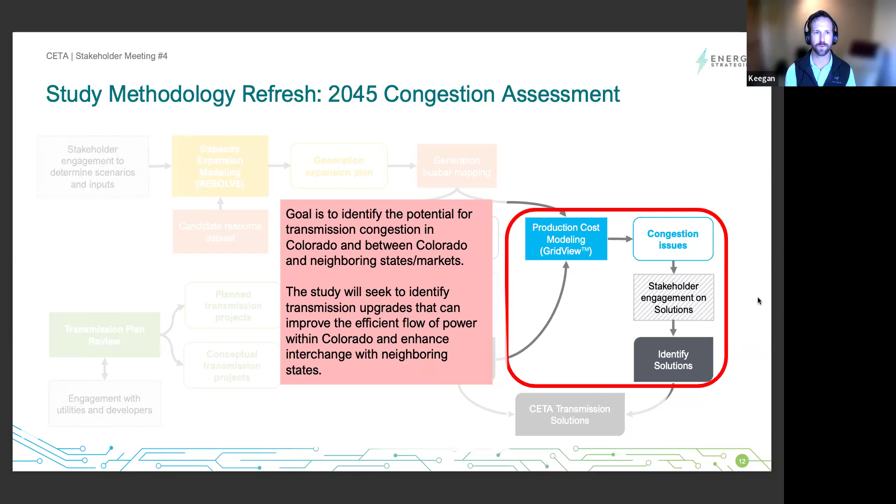We really don't have much choice as to address the reliability and the deliverability needs of the system, right? We can't go without addressing those, literally from a NERC compliance standard, but also philosophically, we've got to round that base first, so to speak. The next base we hit is this congestion assessment, and we take into account all those other upgrades first. So a lot of times we don't see a lot of issues when you look at it from that perspective. I'll go to the next slide here, and I'll kind of explain what we found.

So this is the final analysis, basically just saying what I said. We performed the study. This is all focused on Colorado and Colorado's interties that connect to other states. And we're looking for congestion that, if addressed, could improve either in-state transfer of power or interchange between other states. The generation loads, everything's consistent with all the modeling we've done so far. So this isn't a new model. It's all entirely consistent down to the exact generation fleet. So that's why we're able to say some of the things we can say.

It's all internally consistent. So once we identified some of those congested interfaces, we did a little power flow modeling to develop some solutions. We had a lot of data and expertise to draw on there from the work that Thomas mentioned a lot of. And we were able to select additional upgrades and test them in the production cost model for their ability to mitigate that congestion.

So one important concept is, do you want to address all congestion? No, that's probably not the case. There's an efficient frontier from this perspective, which is that some congestion on the system is probably good. It means you haven't gold-plated your transmission system, and you don't want to address it all because the cost of the transmission is likely more than the cost of the operational savings that you might realize, and other savings.

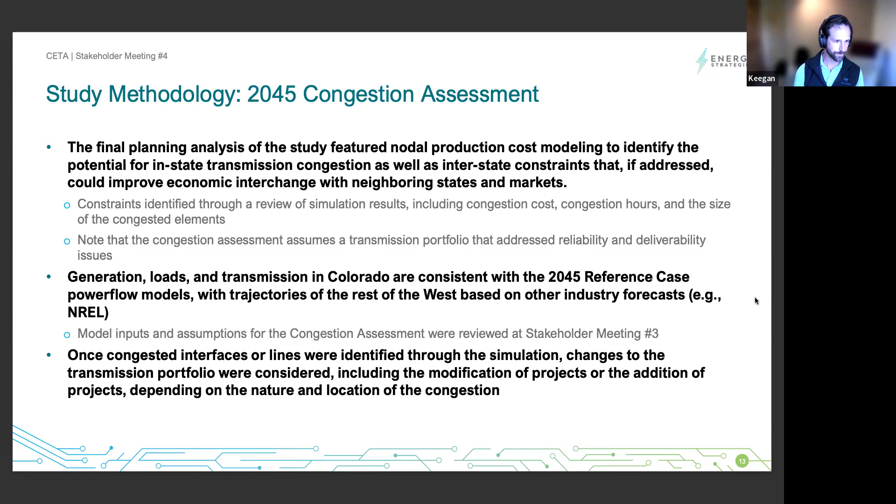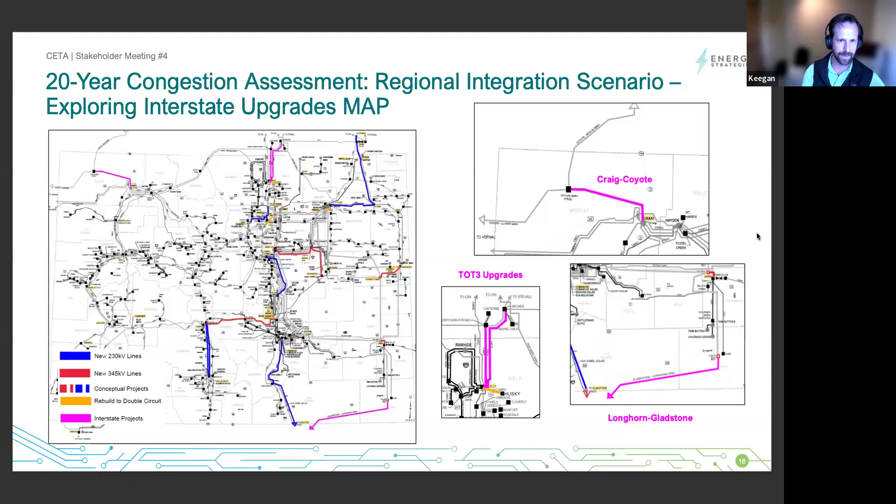So I'll go to the next slide now that you've got a sense of that, and just present some additional study results. These are some additional dispatch modeling results. What you see moving left to right is us adding more transmission. The general trend is that as we move from just the in-state reference portfolio upgrades and add some of these additional economic upgrades, we mitigate some of the solar curtailment we observed. The interstate projects help that further.

Clean energy penetration is always going to move around a little bit. It's just so sensitive to what unit is dispatched where. But overall, the portfolio is hovering around 92% clean in Colorado around this time horizon. And all the transmission is effective at pushing down CO2 emissions in the state. And importantly, we did see some material production cost benefits.

So one of the things we observed, I think, was savings of about $16 million a year due to these interstate upgrades. That doesn't seem like a lot, but on a 40-year present value basis, I think that's around $300 million or so, all discounted back to present day dollars over a long time horizon. So that's a material operational savings, and that's not to say that's the only benefit of those types of upgrades.

We'll explore some of those other benefits later in our study, and that'll be in the technical report. But we do think some of these interstate upgrades are showing some important efficiencies just from an operational standpoint, let alone from a load diversity sharing, a kind of resiliency risk mitigation perspective. There's a lot of other categories of benefits we'll explore.

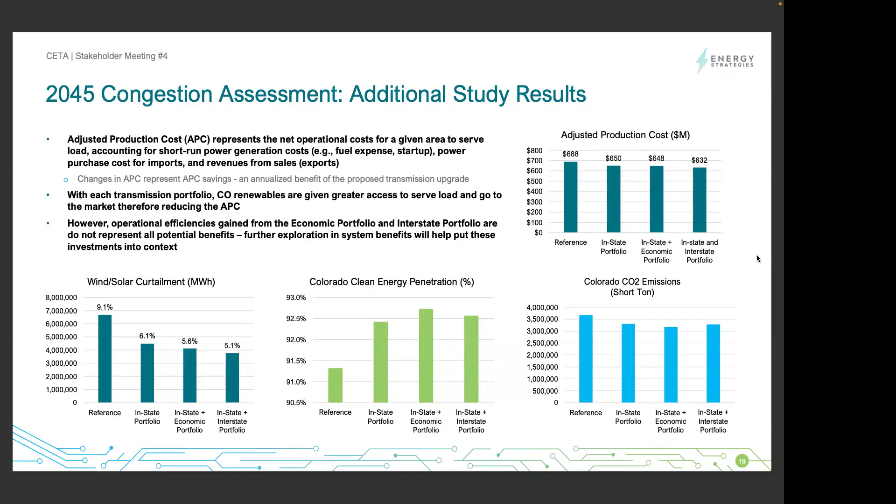That makes sense. Thank you. Yep. Just want to address that, that one's easy. So go ahead, Tom. I think you're next. I think so. Cool. So if we go on a couple of slides.

So we'll talk more about where we are with our final portfolio. In the last meeting, we talked about our reference studies, our 20-year analysis. If you go on to the next slide, it goes back to the flow chart that we'd been starting from. At the last meeting, we were really just focused on that orange box there. We're doing the power flow modeling, getting our 20-year models all established, looking at the reliability issues and coming up with solutions to those issues.

And then as we've expanded to come up with what we call our final portfolio, we also took into account the production cost modeling that Keegan just talked about. We uncovered a few little projects based on that analysis. And then we also did some alternative analysis looking at the portfolio that we had and how some potential alternatives might adjust our final portfolio, and also taking into account stakeholder feedback to come up with that overall portfolio.

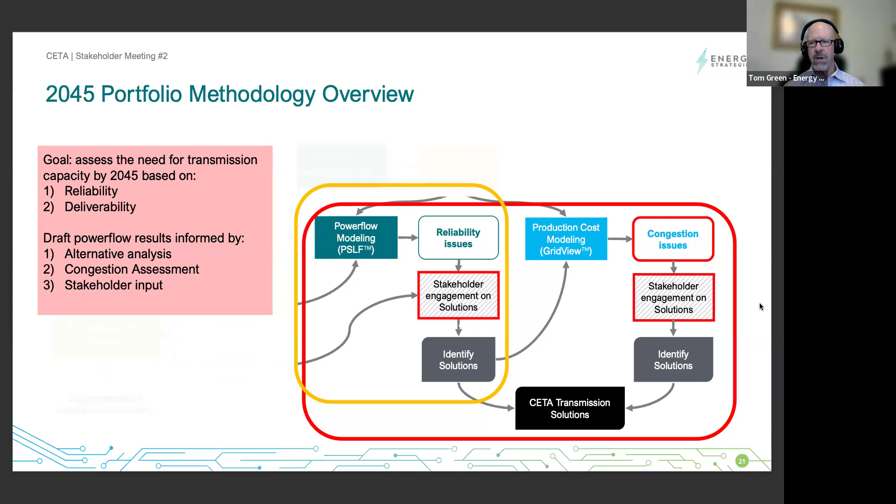As we talked about doing both a reliability type analysis and a deliverability type analysis, at that time we'd focused on deliverability by breaking the system into 9 zones and then looking at each of those zones individually, scheduling up the generation to high or maximum levels within each of those zones, scheduling it out of those zones and determining what the transmission issues were, and then coming up with solutions to those issues.

And again, the idea, as Keegan mentioned, was to develop a transmission system that would be reliable for all types of conditions. Then we took that information and put it into more of a reliability type analysis, scheduling down the generation and ensuring that the system was reliable from a more holistic statewide view. And so that's how we developed our original portfolio. Going back to that last stakeholder meeting, our draft portfolio was near $4 billion. We had a lot of new projects and a lot of reconductor costs.

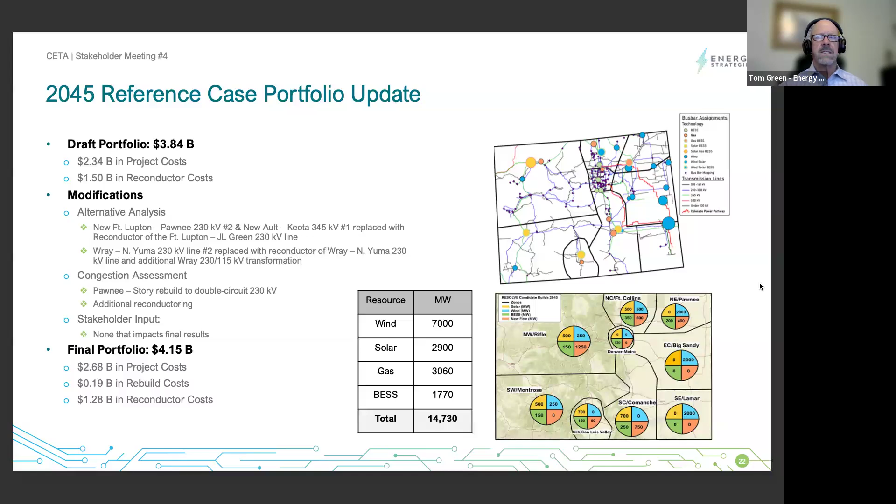If you go on to the next slide, this is a map of the final reference portfolio. I didn't put in a comparison to the last because there's really not a lot of change between what we're seeing here and the last portfolio. But again, the blue lines are new 230 kV lines. The reddish lines are new 345. On this map, I'm not showing the conceptual projects. I'll talk more about that a little bit later.

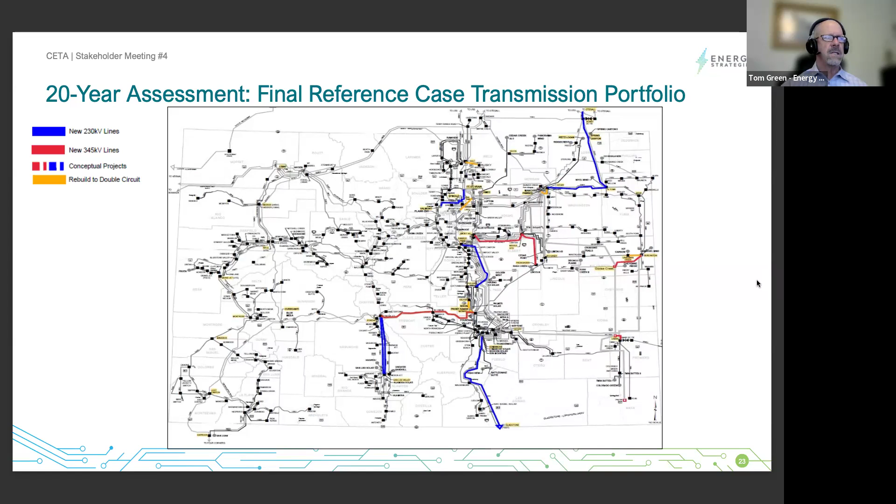And then we have a couple of areas where we've actually rebuilt some existing lines to double circuit. So this looks like there's not a lot, but this is just capturing the new projects, of which there are about a dozen. What's not shown on this map are the number of reconductors that we did, because the map would completely be lit up with reconductors. If you move on to the next slide, just to talk a little bit more about some of the alternative analysis that we went through, I've highlighted a couple of areas where we found some efficiencies.

In the preliminary portfolio, we were looking at building a new Pawnee-Fort Lupton 230 kV line, really a second line in that same corridor, and also a new Ault to Keota 345 kV line. I still think those are great projects and could actually be part of a portfolio in the future.

But what we found when we were looking at alternatives is that if we did some reconductoring on some of the other local lines in the area, in this case the Fort Lupton to JL Green line, we actually saw that the problems that drove those new lines were mitigated. And so you see there was a difference in cost there of about 200 million just by reconductoring some existing lines rather than building those new lines.

I did list here the St. Vrain to Windsor reconductor. That was one of the lines that came out of the congestion analysis. The only other line of note that came out of the congestion analysis was a second Pawnee-Story 230 kV line. That's one that I think other planners have seen in historical planning, that there's a single tie between Pawnee and Story. It's a 230 kV line, and that just makes sense. It's a pretty short line, about 10 miles. And so that popped up in our analysis too, and we put that in our final portfolio.

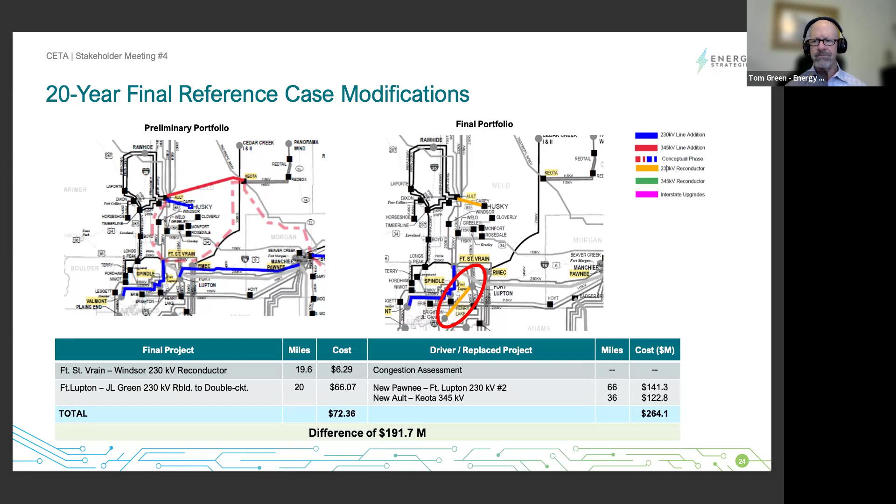Going on to the next slide is another example of where we were looking at a line. This is in the northeast area of Colorado. It's a line between Wray and North Yuma. Originally, we looked at building a second line between those two buses, and we found, going through some alternative analysis, that if we just reconductored that existing line, some of those issues went away. Now, we did still need a new transmission line between North Yuma and up to Sidney, and between Wray, North Yuma and over to Story. So those were key elements in the portfolio.

That's an area of the system that is really mostly 230 kV, 115 kV. So once we started adding resources in that area, we saw a need for additional transmission. But you see there was another example of a savings of about $30 million just by going through that exercise.

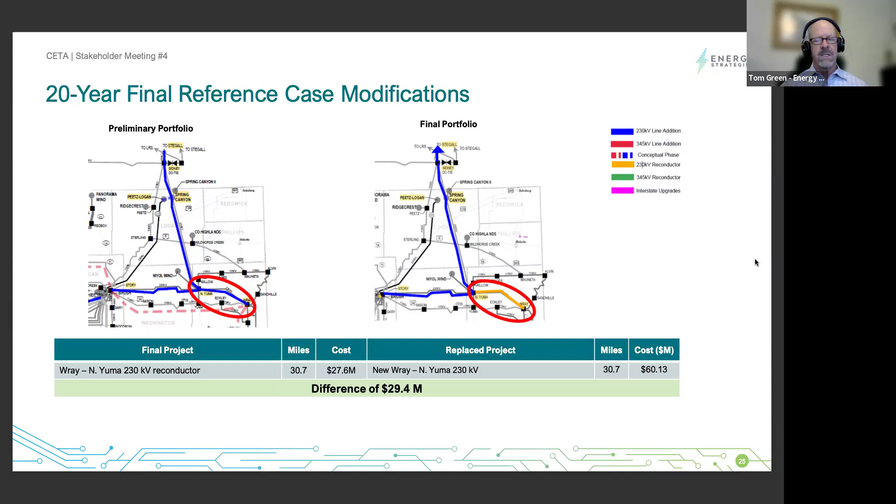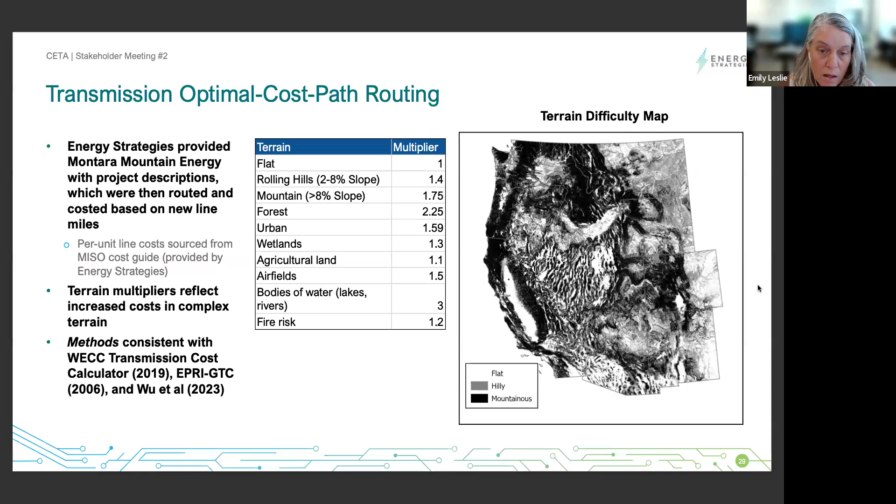With these inputs specified, the least cost path model identifies the detailed route from point to point, avoiding essentially the darker areas on the map. You can go to the next slide. So we ran the least cost path model for about 150 lines identified by Energy Strategies. The lines range from a few miles to 160 miles in length.

The estimated cost ranges from about $400,000 per mile to $8 million per mile, depending on the technology and the terrain. In some mountainous locations, the total line cost may be up to 2 times the base cost that you would get from the simple MISO per unit cost guide assumptions.

For lines that are specified to be new greenfield corridors, we estimate the location-specific right-of-way land cost for the corridor in addition to the line cost. The land cost tends to be about 1 to 5% of the total cost. It is higher in more densely populated areas. And for locations where we're siting an additional line co-located in an existing corridor, the land cost for right-of-way expansion is estimated at 30% of what it would be for a new greenfield corridor.

So here you see the portfolios visualized. The 20-year final transmission portfolio is shown in red. To the right of that, we have the conceptual projects overlaid in dashed yellow lines. Then the high demand scenario, the interstate scenario, the regional integration scenario in the lower row. And then if we go to the next slide,

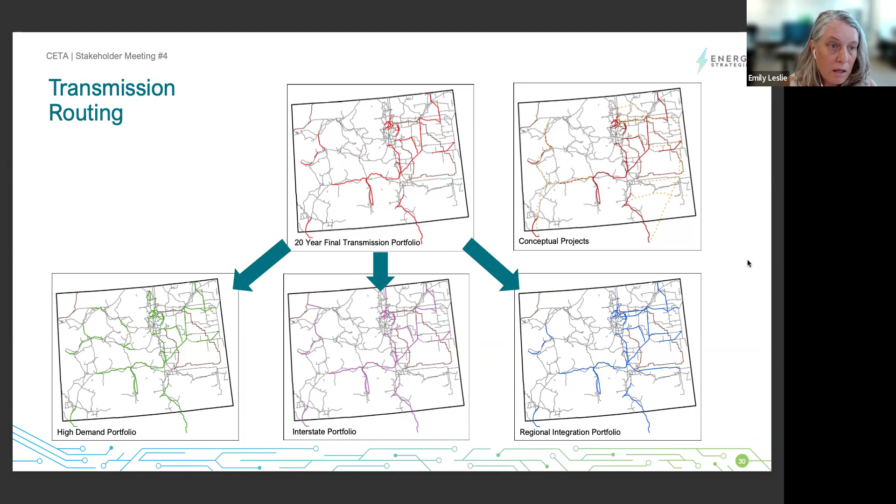you can see the areas where these lines cross high wildfire risk areas. The high wildfire risk areas are shown in red. For the final portfolio, as well as the high demand, regional integration and interstate portfolios, there are just a couple of locations that are common across portfolios where we're seeing high wildfire risk. Then there are a few additional locations of high wildfire risk for the conceptual projects, mostly in Western Colorado.

I'm not sure if I said this already, but the definition of high wildfire risk is based on USDA and Forest Service data. We take the top quartile of risks to structures from the information that they've published.

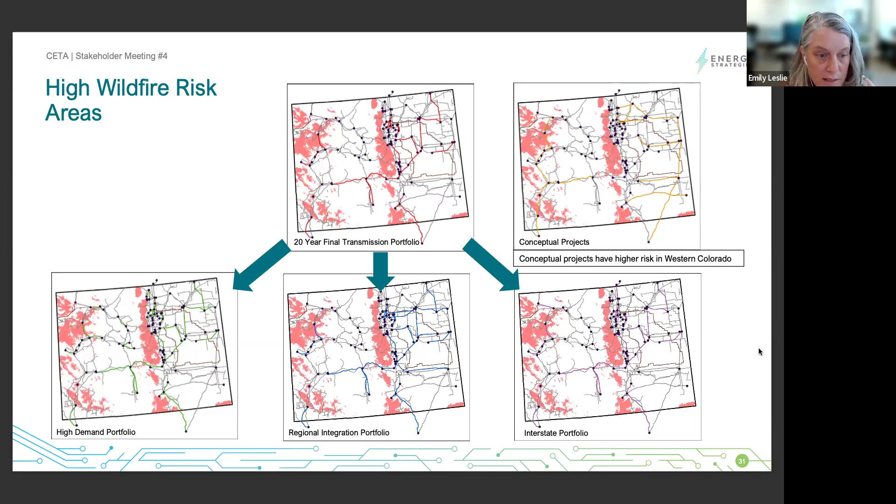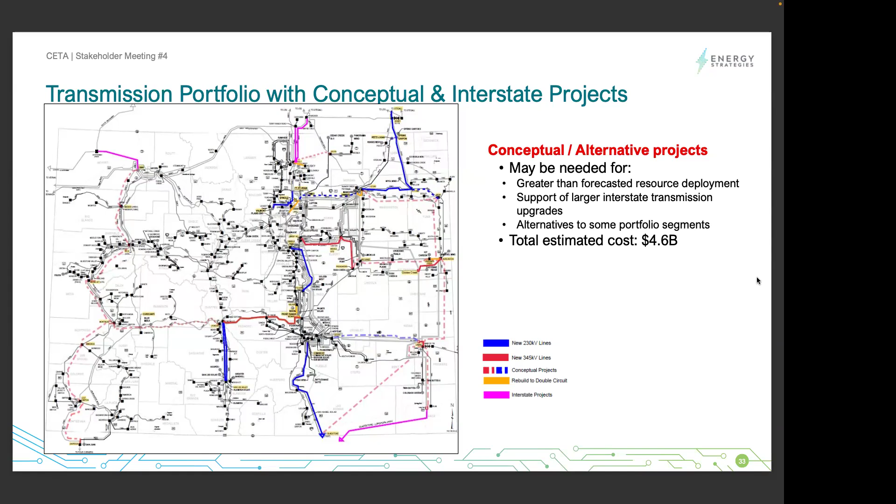But we looked at adding a bunch of generation in the Gladstone area, and it was like a $2 billion transmission project to make the thing even work. I want to make sure that's in the report, like a caveat, that Gladstone is not the final solution. You get to Gladstone, that's half the problem. Just make sure people are aware of that, because I don't want people to think, oh, just build and we're done. Yeah, appreciate that, Chris, and we'll get that captured.

That's actually one of the things we struggled with in the interstate analysis. For our connection into Gateway South, there's complications that would need to be addressed. There's downstream constraints in New Mexico. I think TOT 3 would be the one where Colorado maybe has the most opportunity to do things autonomously. That would need maybe less upstream upgrades, but we'll talk about that. I do have some findings on next steps in that area.

Thank you, Chris. Yeah, I agree. These are great ideas. It's just, if you're only looking at Colorado, like Ryan said, you get to Gladstone, and if there's not the same type of vision and build out in the 20-year future for New Mexico, you just run into roadblocks there.

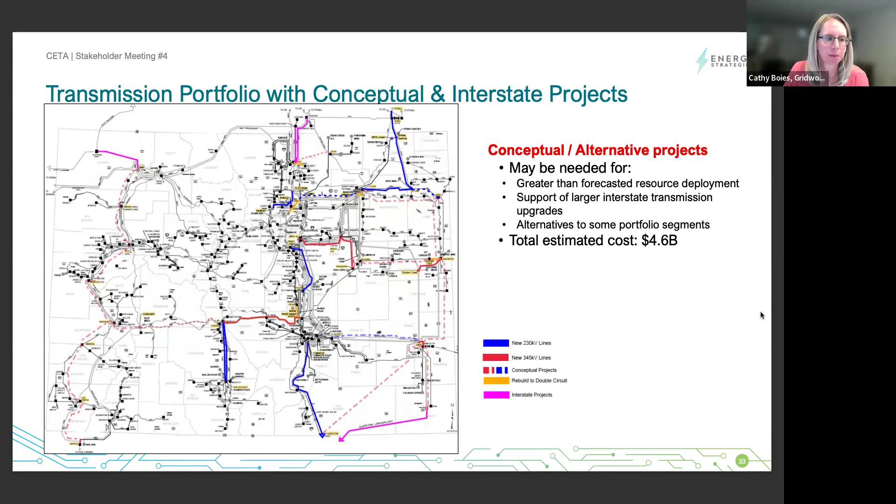Sure. So we looked at 2 scenarios, and this is where things really got challenging. So if you go on to the next slide, you think about building a 20-year model with over 10 gigawatts of new resources in there. I think we had around 14. And all of the issues associated with that and the transmission limitations just associated with that.

And then one of the things that we agreed to do was look at a scenario that was even higher demand. So we call this our high demand scenario. And so just to give you an idea of what this looks like, on top of the resources and the load increase that we added for a 20-year scenario, we put in roughly another 7 gigawatts of load and resources to go along with that load on top of what we already had in the 20-year scenario.

And the idea behind this, of course, was, if you think about a future where you have a higher demand growth, is the portfolio that we thought about for the reference case adequate? Is it not adequate? What kind of things need to be done to that? So again, our incremental case had close to 14 gigawatts of addition, and then we added a 7 on top of that. So a 50% increase on top of that.

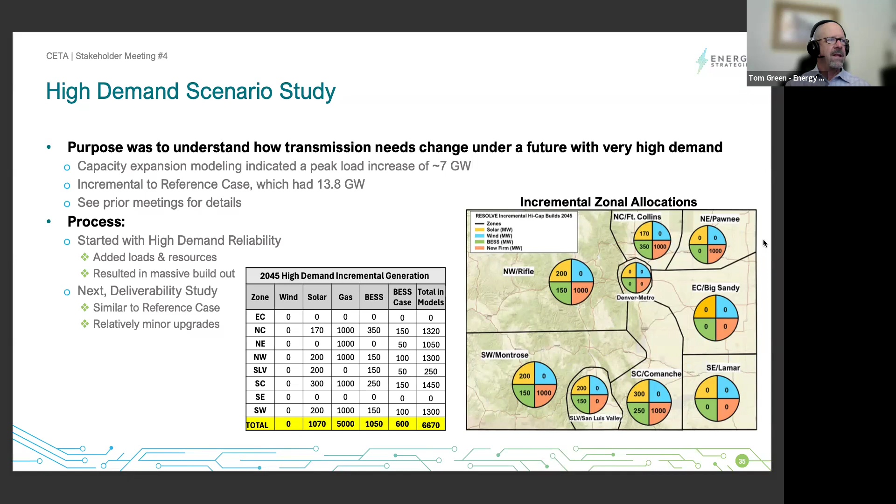So I think if you move to the next slide, just to give you an idea of trying to develop this case, we had significant issues just trying to get the case to what we call solve or converge or even be able to work because of the extreme lack of transmission between the reference case and this now high demand case. And so we had to do a lot of massaging to the case, work on the transmission that was already there before we could even get to a place where we could try to think about the deliverability of the case.